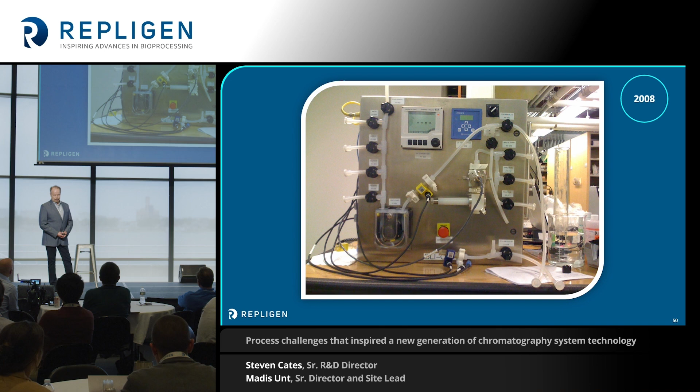After building the system, we realized that there were several problems with it, primarily revolving around the pinch valves. The valves would either fuse the tubing closed, imparting heat into the silicone tubing, or they would not close completely, causing a leak of product. This was really a big problem for this customer, posing serious contamination issues and even product loss of up to several million dollars. So it was a big issue.

So we kind of thought about it and said we owned a diaphragm valve company, so we should be able to actually design our own pinch valve. And so we proceeded to do that.

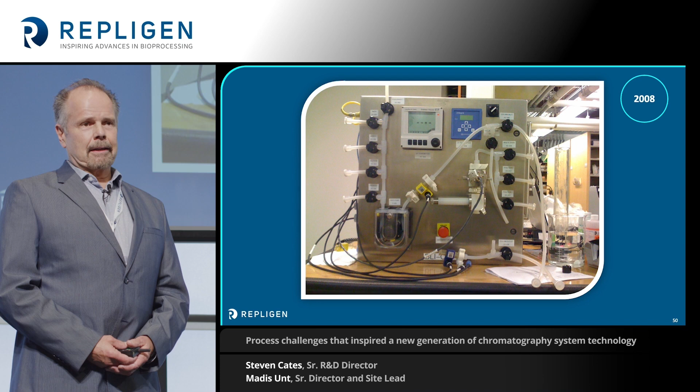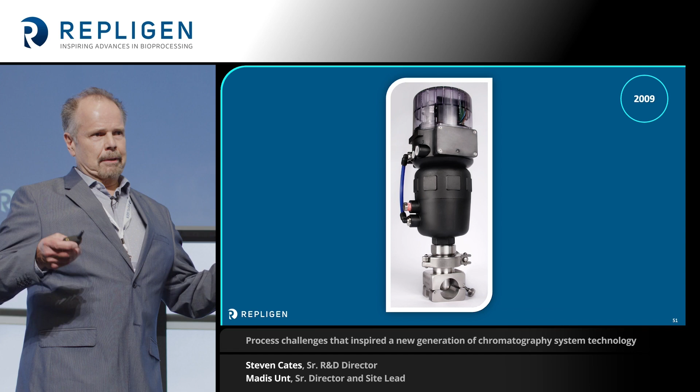The first iteration is here. We had to think about the valve and make it robust, and think about the difficulties with what pinch valves do and how they pinch on the tubing. So we designed the pinch valve so that the stem actually matched the interior radius of the tubing, and then we captured it on the outside, so you wouldn't have the typical result of the tubing expanding like the knife-edge or guillotine valves of the day would do, which would really damage the tubing seriously.

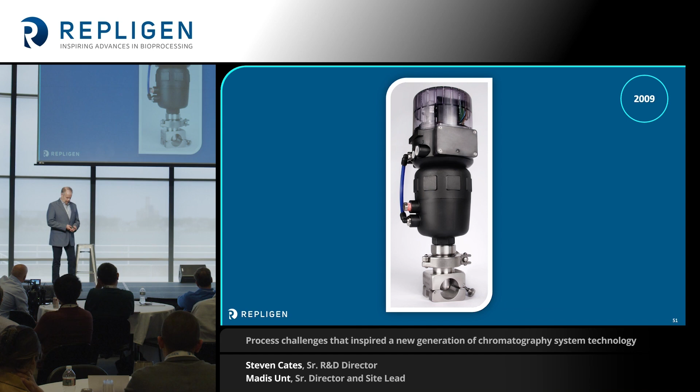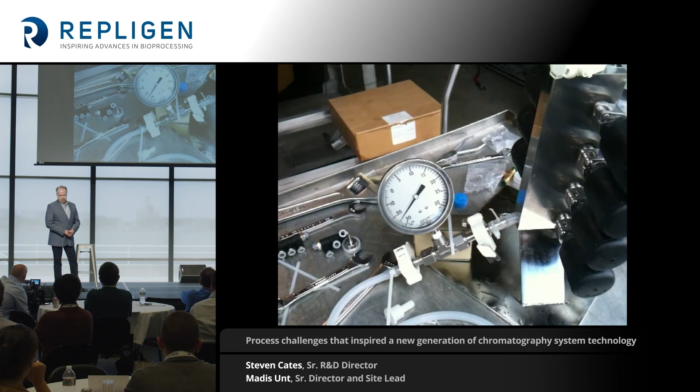So we did quite a bit of testing, and I can advance here. So this is a video of just testing the valve arrays. We did use vacuum as well as positive pressure to make sure that we had a good seal, and you can see we're actually at negative 15 psi here.

It does look like a garage, I have to say. And it was a garage.

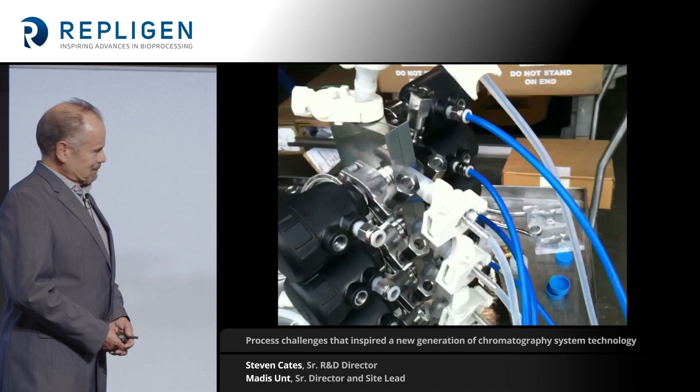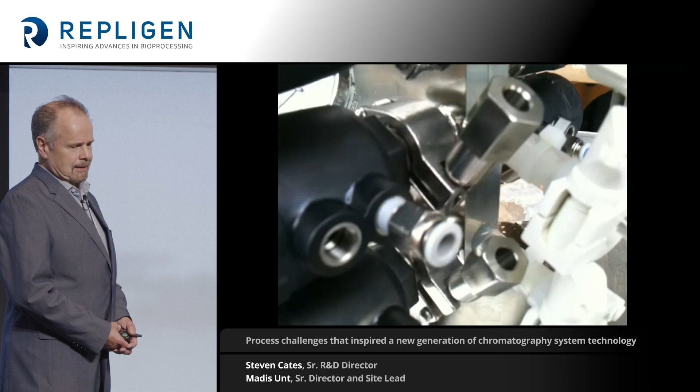We tested at 30 psi with this version of it, but eventually we were able to get up to 60 psi. The limitation here was the silicone tubing, which I'll get into later about how we addressed that issue.

Yeah, so we replaced the valves on the original skid that Steve had built for a customer, and as a result, the customer was really happy with our new pinch valves, because that was able to solve their everyday hassle and additional process validation steps they had to take to make the old system run. And for us, this was actually just a small sign that maybe something we were trying to do in that garage actually works, and people may want those valves. But this was actually just the first important step in our journey of trying to create single-use systems that could outperform those old school stainless steel setups.

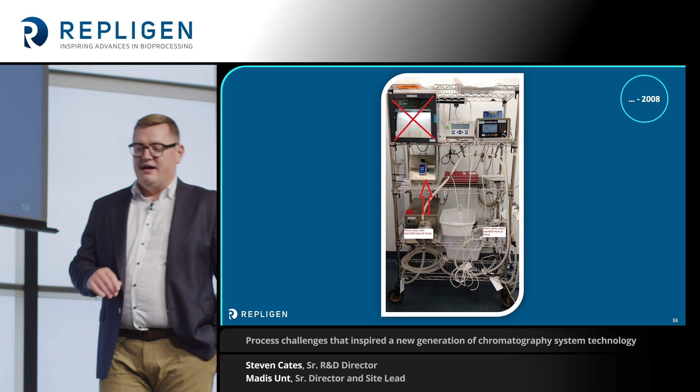And there was a good reason for that. Back at the time, this was actually the single-use technology, the leading technology - I mean, engineered.

So basically a shelving with components randomly dropped on those shelves and interconnected by a mess of tubing and cabling. So we would actually call that an explosion in the spaghetti factory. So just things had gone a little bit sideways there.

So Steve, what are the main problems with that kind of setup? I mean, many of you may have seen this - it has tremendous hold-up volume and difficulty to drain, and also potential leak points at so many locations you can't count them. An operator would actually have to manipulate the tubing, holding it up over his head to get to a low drain point. It was just a cumbersome mess to try to operate.

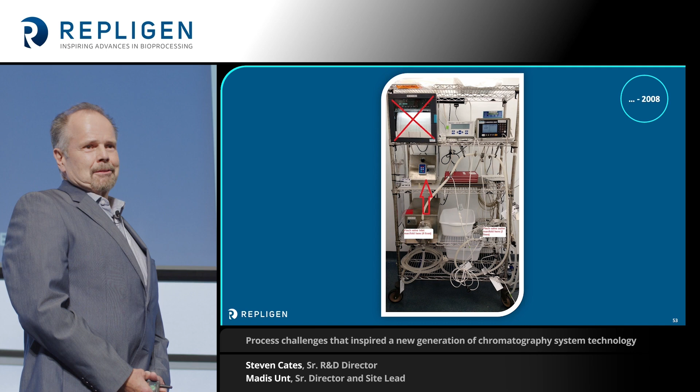I don't know if any of you have used this type of system - this was back in 2008 or 2007. It was really, I hate to say comical, but it was difficult to deal with. Up there in the back left corner, that's your CFR Part 11 data logger, by the way, on paper.

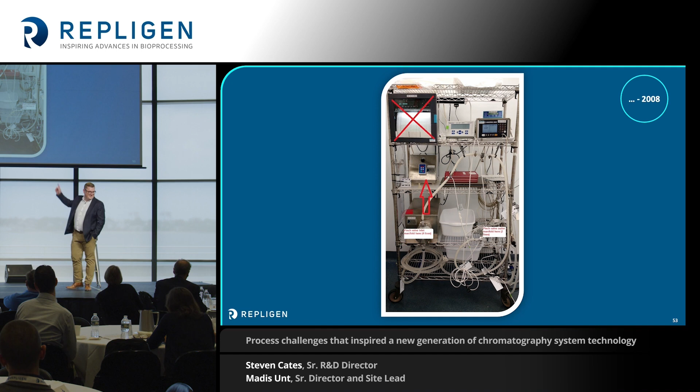So as we were designing these systems, we partnered with a silicone molding company, and we decided to improve on the valve designs by molding the sections together so we could put multi pinch points near the main branch, very close, to eliminate dead legs and reduce the hold-up volume.

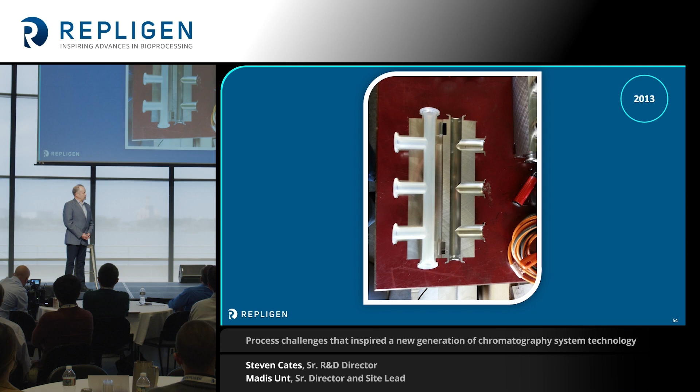So we took this idea and applied it to the first generation of a chrom system. It doesn't look like the one in the back, but the first generation was like this. We'd use the multi-valve blocks you can see, a little bit better than the shelving, on the bottom there, and then these are just T-blocks.

This is one of our first systems, an isocratic system for a customer, and it's actually still in use, believe it or not. We switched it to gradient, so it's got multi-pumps on it now, but it was really well received. The customer really liked it because it was the first generation of really doing something like that.

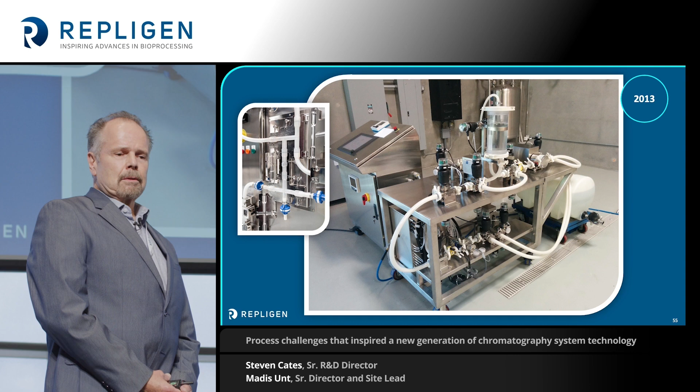On the insert here, as we kept iterating the valves, you can see the valve block that we started reducing. We did over molds, getting the pinch points very close to the main branches so you virtually have zero dead leg, and were able to encapsulate the silicone tubing inside these exo housings of the stainless steel blocks. This type of valve is what's on the skid in the back.

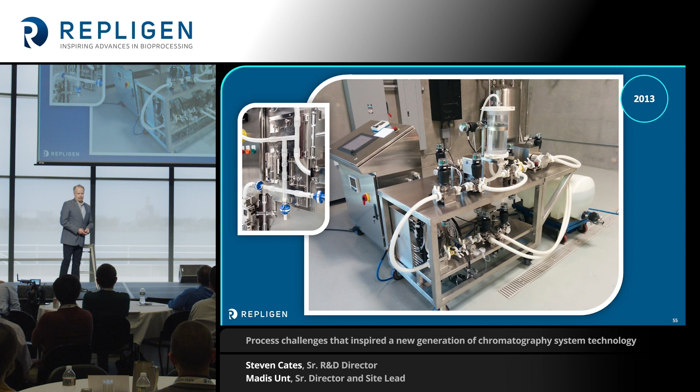So we packed up a Sprinter van with a single-use skid that we designed and took it mostly to the East Coast, Maryland, North Carolina, Washington, D.C. That was the marketing back in the Sprinter van, guys.

And I have to tell you, in Washington, D.C., when I went to the FDA, security around Pennsylvania Avenue was freaking out with a big blue van with dark windows and equipment in the back of it. We were followed for a little while, so it was pretty interesting.

But we would go to various customers and roll it out in the parking lot and actually test it there, or do it in a conference room in a show and tell. And we received really good response from it. Most of the end users would say, if you sent me a flyer, I would not have understood it, but if it's right here in my parking lot, I can see what you're talking about, how well it's going to work. So it was really good.

So for the development, we thought about the silicone tubing and the difficulties with it. So we really looked at encapsulating the silicone, and it solved a couple of problems. It allowed us to adjust the slope. You could actually have slope with the silicone tubing now instead of sags, and you could force it to drain to a low point, like on a TFF system shown here.

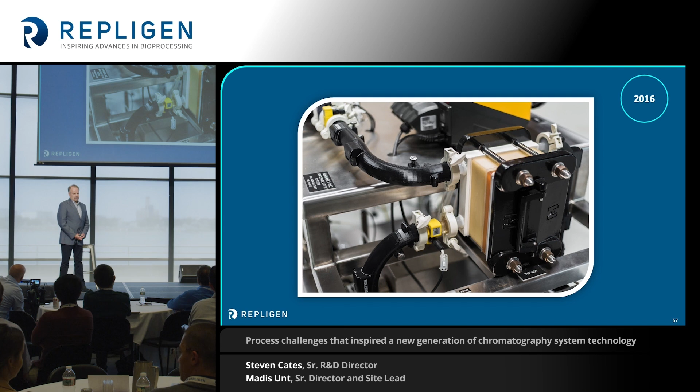It also allowed us to use unreinforced silicone inside this encapsulation, and you could operate the system at stainless steel pressures, at 4 bars, 60 PSI, with no issues at all. So you're actually able to match or exceed conventional systems, and this opened up a lot of opportunities for other processes like virus inactivation, of course TFF here, filling systems, everything. So this really was the next generation for us.

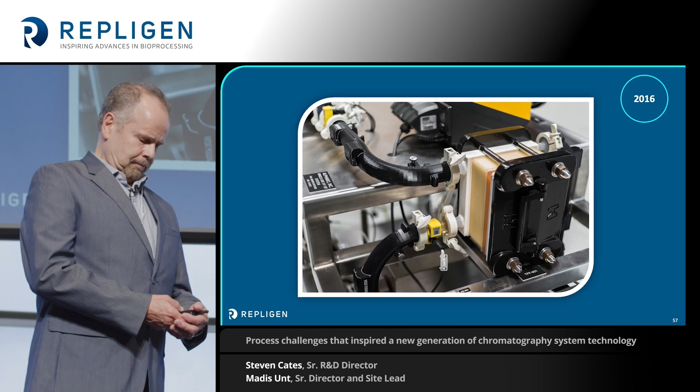Stepping forward to 2016, we decided through continuous iteration we could reduce the volume and footprint of the systems and make them really compact and more efficient. This is a benchtop version of a quarter-inch chrome system we developed, and as you can see, the entire flow path is encased in stainless steel.

It does look a little bit more like that, the unit. So these inlet blocks, right now there's still a bubble trap on this one here.

After looking through the whole process, we thought we could optimize it even more by taking the bubble trap out and just using a sterilizing filter as the bubble trap and gradient mix point, which we've found greatly improved homogeneity on the whole setup, and it's really quite effective. Most bubble traps are still widely used, but it's almost a contradiction in terms.

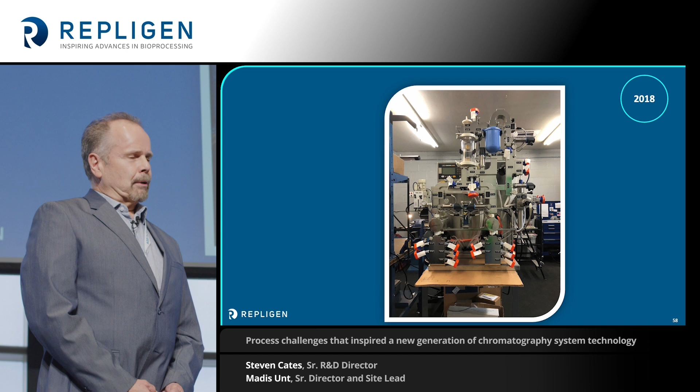You have a vessel there that has 500 mLs to 2 liters holdup in it, and it really dilutes your gradient when you're trying to optimize the gradient control here. So that's just been the next iteration of our process, and this design concept is what you see in the back of the room now.

Absolutely, and it's always fun to invent and build new things and in the end blow them up. I mean, that's what we did a lot. So if you overpressurize silicone tubing and let it go with a bang, it's actually quite cool when this happened.

But when the guys were doing the trips with the Sprinter run, I wasn't in the company at that time, but I guess they actually didn't want to do door-to-door chromatography selling or try to have a Chrome system in every household in the US. So they were actually more looking for interested parties, companies and individuals thinking the same way and understanding the challenges the industry had, and willing to solve those challenges together.

And that's why we started to build a lot of custom systems together with those customers. We went through the majority of downstream applications, like Steve already mentioned: chromatography, TFF, virus filtration, bulk fill systems, or buffer dilution systems. And building those custom systems actually gave us a lot of experience.

We didn't have the time and money in the beginning to immediately go to serial production and start putting out thousands of Chrome skids. So we started actually with the customs, tailored for particular customer needs, and that gave us a lot of experience and ideas how to even further develop our technologies.

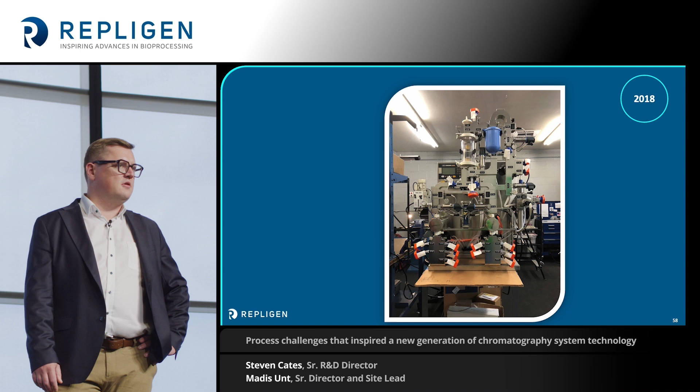At one point we started to realize that we were using the same design features that Steve and other bright guys had come up with in those custom projects, again and again. So we had an ecosystem of Lego blocks. We just had to reassemble them for particular custom projects, which was actually great, but we still had to figure out two challenges.

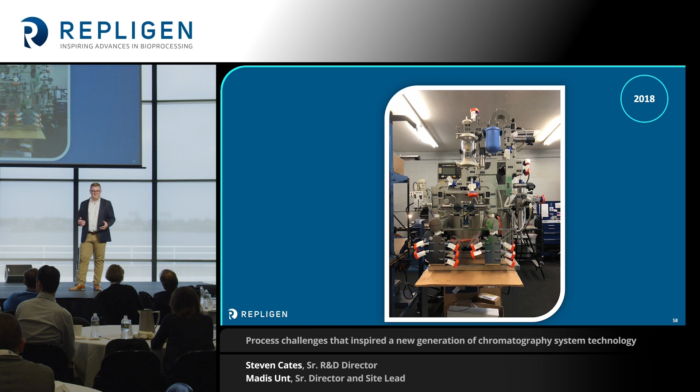The custom projects are relatively expensive, and probably most of you know that. They're expensive and time-consuming because of the design, review, design again, and then review again, and build and test, etc. So it was only affordable by a fraction of customers.

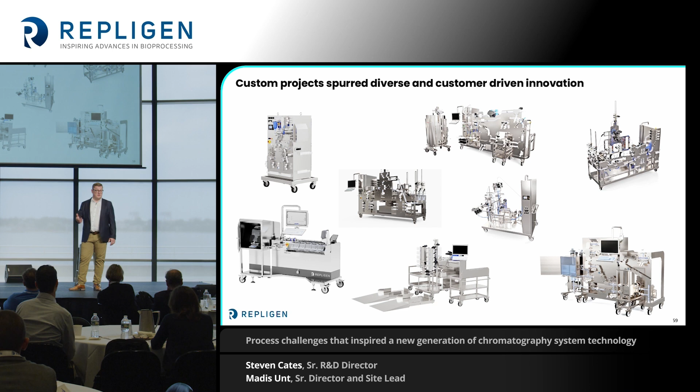But what we actually wanted to do is have our technology and inventions available for smaller companies, startups like we used to be. So we realized the time was right to start standardizing and encapsulating our technology into turnkey, fully automated systems, and that's when we started to develop the standard platform.

Dozens of conversations with various customers, design iterations, and testing validated solutions have shaped those systems into what they are today.

Processes that won't let you down. I mean, the performance is outstanding, the user experience is developed keeping in mind the operators, and the automation system allows you to develop various recipes and customize your recipes according to your exact process needs.

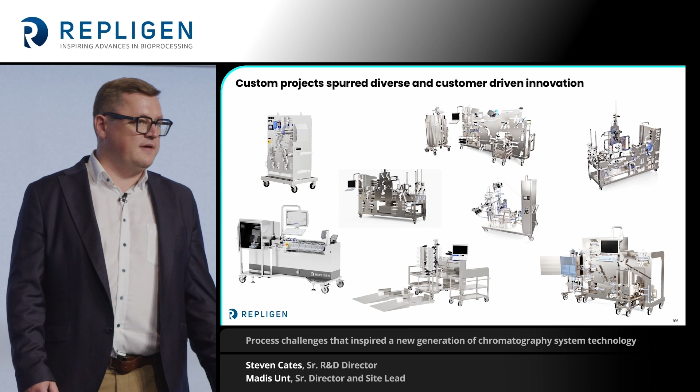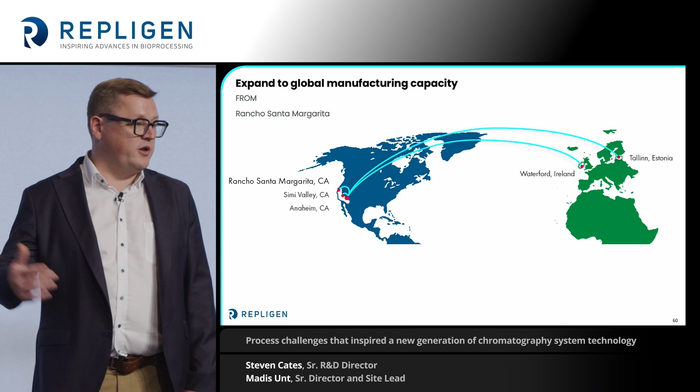And we were able to package it into nice and shiny stainless steel enclosures and make it affordable and accessible with a short lead time. And the best thing is we always kept scalability in mind, so the systems are available from 1/4 inch to 1 inch size, including the same technology, the valve blocks, and

the molded consumables with no dead legs, what Steve was talking about, and the automation platform. So that's what you can see back there in the room as well. I encourage everyone to go and see and test the system.

One thing I wanted to add too is people ask us why Estonia. When we traveled to Estonia to meet Madis and the team, we opened a small shop there. There were only 4 employees originally, but it's people like Madis and their driven ability to manufacture. There's just a culture there that's truly amazing, and it's proven us outright.

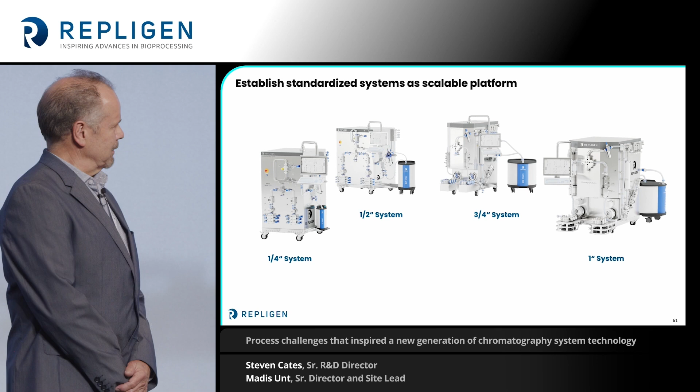It's a great experience for us all. There's like 55 people now in the Estonia team. Madis was one of the first 4, so it was quite an interesting growth pattern. Estonia has, by the way, the most startup companies in Europe per capita, and it's the home of Skype, with only 1.3 million people.

But considering the technology, we are by no means done. There's a lot of stuff that Steve has in his desk drawer that I should materialize. I'm not sure if I want to. We'll just say stay tuned for the next stuff. There's much more fun stuff going on, much smaller, tabletop, bench-top, and bedside stuff. So we're looking forward to that.

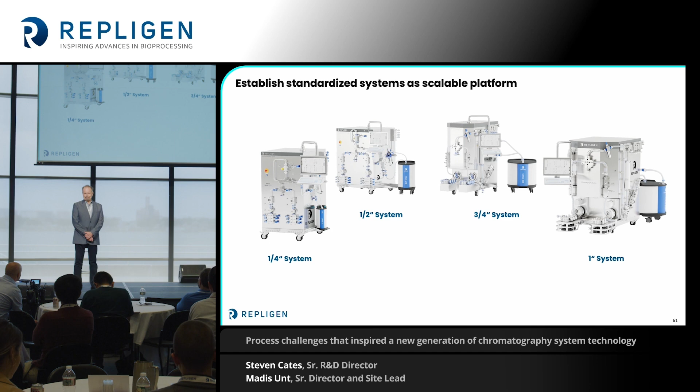All right, everyone, thank you all for being here today. It was really nice. Everyone's a little quiet after lunch, I'm sure, so it's nice to hopefully wake everybody up. So Madis is going to do a moonwalk. They held off serving alcohol. All right, well, thank you very much. Thank you.